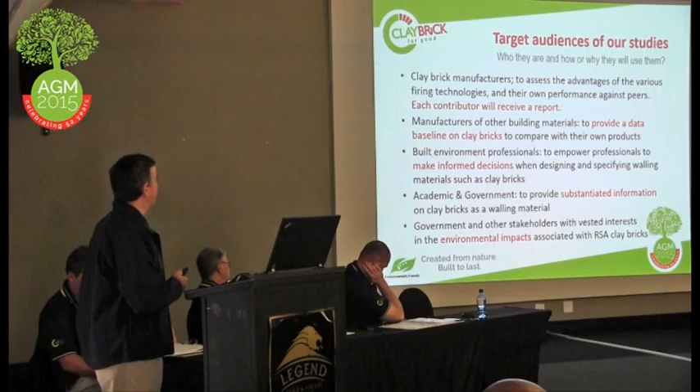I'm sure you're wondering how we're going to get the benefit out of a lot of this research and these studies, and I'm hoping it's now going to start showing that aspect of how we're going to use this work.

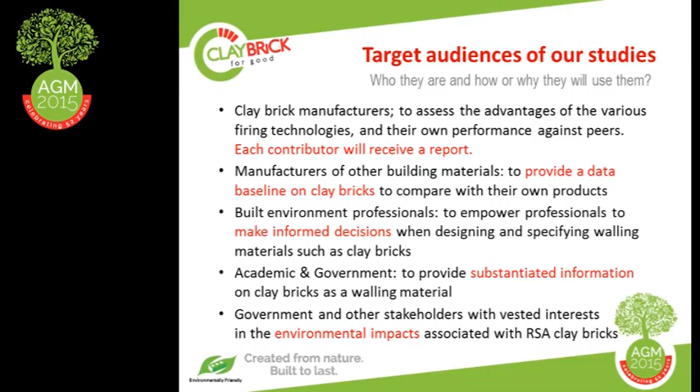Each of you who contributed to the life cycle assessment - my thanks again for your efforts - will receive a report indicating where you stand in relation to your peers on a number of environmental indicators. For example, on carbon emissions and energy intensity, you'll be able to benchmark yourself and your technologies against others in the sector.

I'll throw up a couple of slides to give you an inkling of how this might be used. It'll provide baseline data, and I think other building material manufacturers will now be able to compare against you guys in the clay brick industry, and they'll all have to benchmark themselves against you.

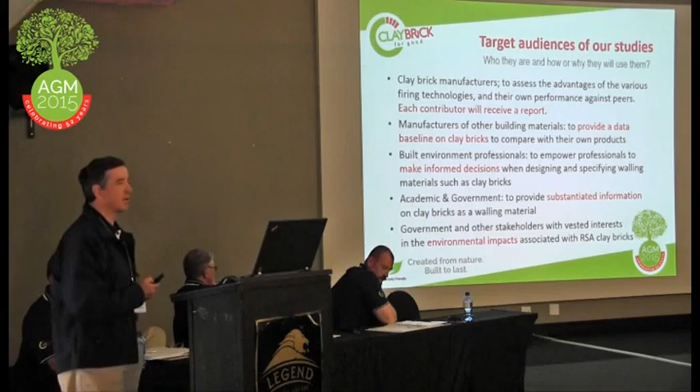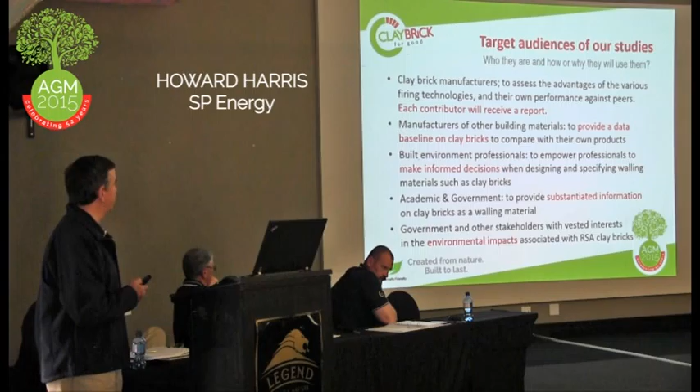I think architects will be in a better position. I've already had queries from architects in the green building sector wanting to put together comparative data on various building systems, and we're going to find this LCA data can be slotted into some of these analyses.

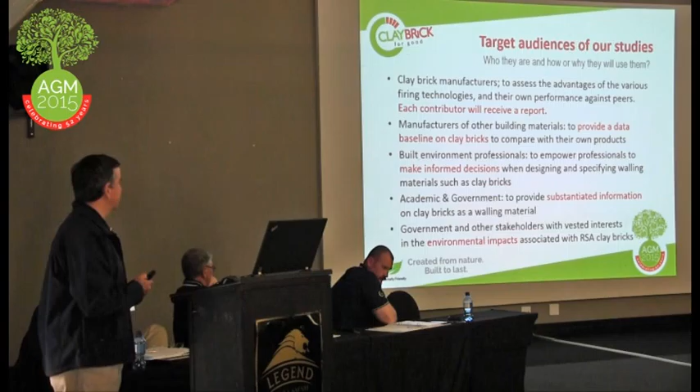And of course, government and academia now have substantiated information, and they can assess the environmental impacts of clay brick on a fair basis.

The environmental life cycle assessment - what is it, where is it, who will it educate, and when and how will we see the benefits? Hopefully I'm going to answer some of these questions, but it's here. Ladies and gentlemen, it's the biggest technical or research project I believe the CBA has ever undertaken, in support of these three pillars of sustainability, and it actually exists.

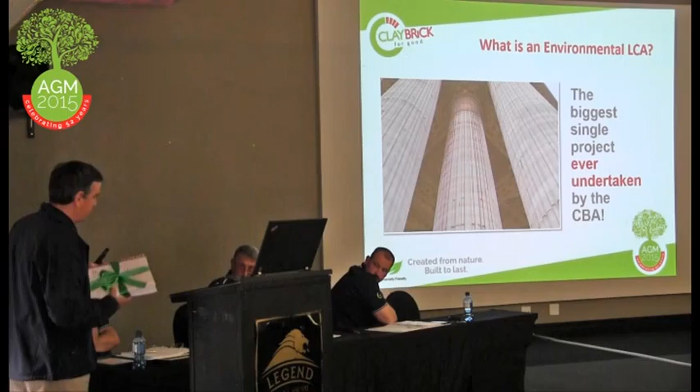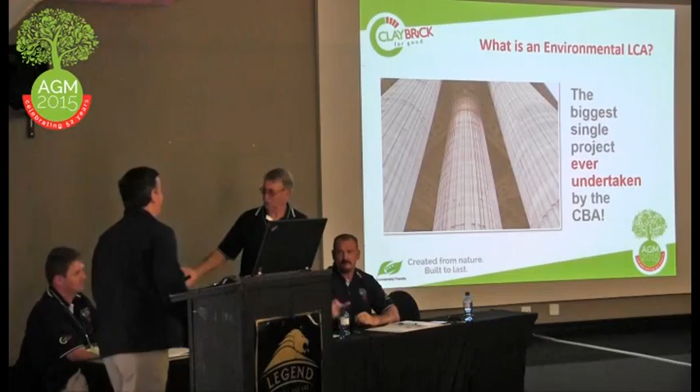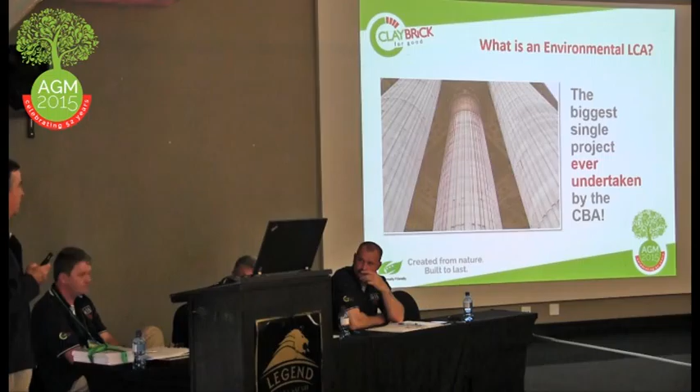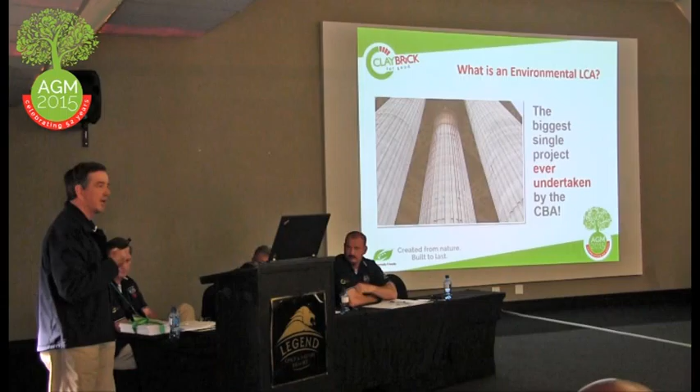A significant investment by yourselves, an excellent bit of work by the University of Pretoria. The lead student who did this work got his master's degree cum laude. It has been recognized by the Swiss reviewers as excellent work, and in the process we also have an additional spin-off: the thermal performance study, which I'll elaborate on further.

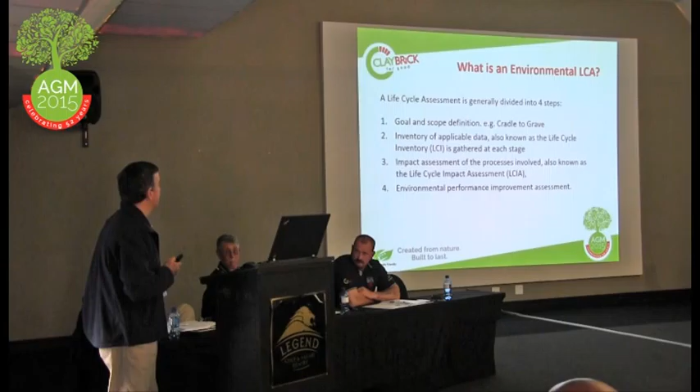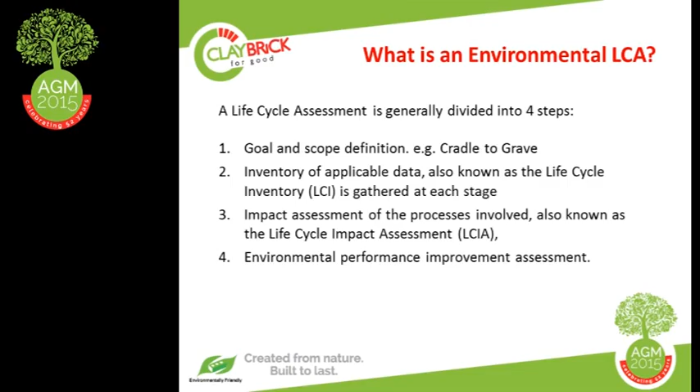For those who haven't encountered this LCA concept, it's an across-the-board assessment of how your product performs at all stages, from cradle through to grave, or cradle through to gate, and then ultimately the recycling stages are brought into account. Generally, following the ISO 14040 or 14044 processes, it goes through a life cycle inventory examining impacts at each stage, then an impact assessment phase, and finally all environmental performances are reviewed.

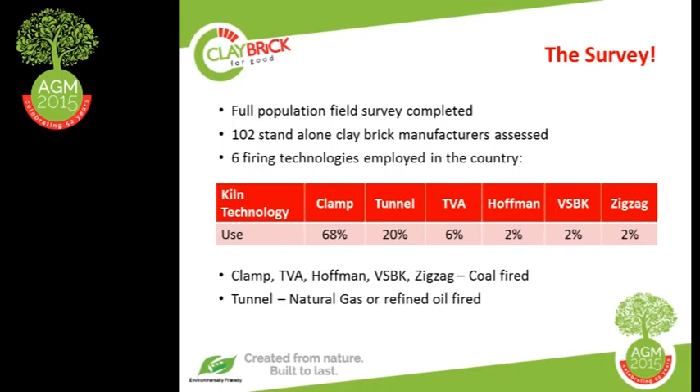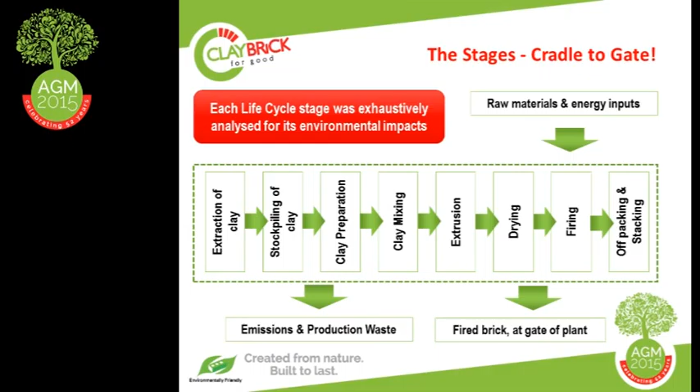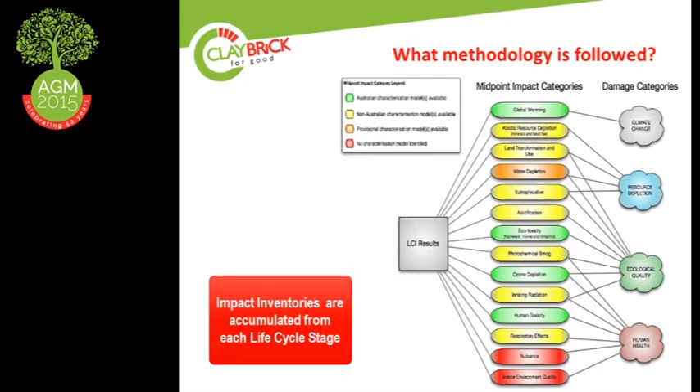In the process we interrogated some 102 standalone clay manufacturing plants, six firing technologies across the board that you'll be familiar with. We followed each stage of the brick-making process and gathered information on global warming, water depletion, acidification, and a whole host of other metrics.

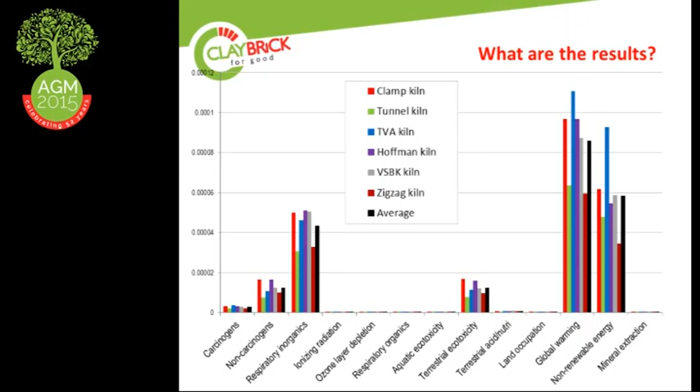So this sort of data is now going to become available to each of you. You'll be able to compare yourselves against your peers, and compare your technologies against other firing technologies.

We're going to, as Nico said, have a roadshow, and more of this detail will be rolled out. The data is vast.

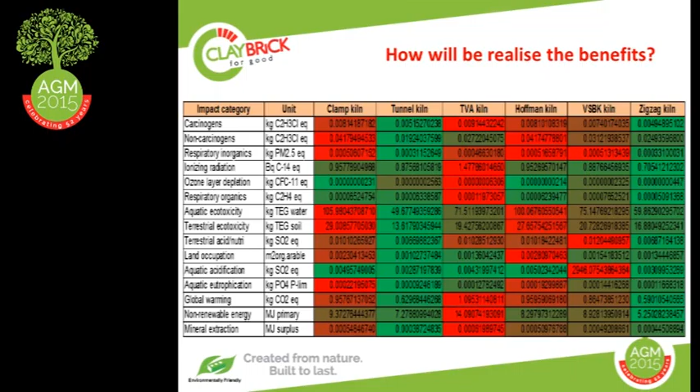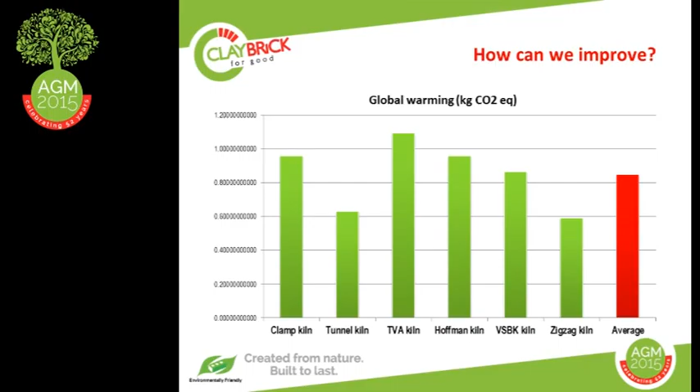Incidentally, the red blocks indicate high or high range on each of those parameters. The greens, as you might expect, are low impact. So each of your firing technologies has environmental impacts, some less than others, and this will be useful to those of you making decisions about perhaps changing your firing technology. As per that very exciting debate held before tea, many of you are prepared to make moves to improve your environmental performance.

So how will we realize these LCA benefits? The roadshow has been mentioned, and this will be an opportunity for you to invite your publics in each of your areas - the local authorities, government bodies, significant clients, architects, etc. We need to get them all there.

I think further down the line we'll find that comparing products requires something like the Sustainable Building Material Index. When we start to compare these IBTs or ABTs, whatever they are, against clay brick on a fair basis, we will have to use some sort of tool such as this index.

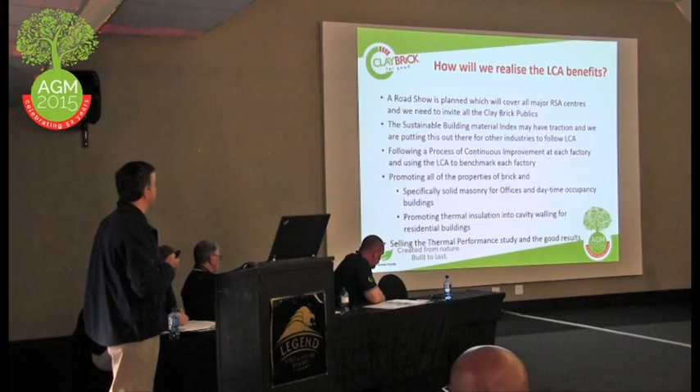Also, for those of you following a process of continuous improvement in your plants, you now have benchmarks. But fundamentally...

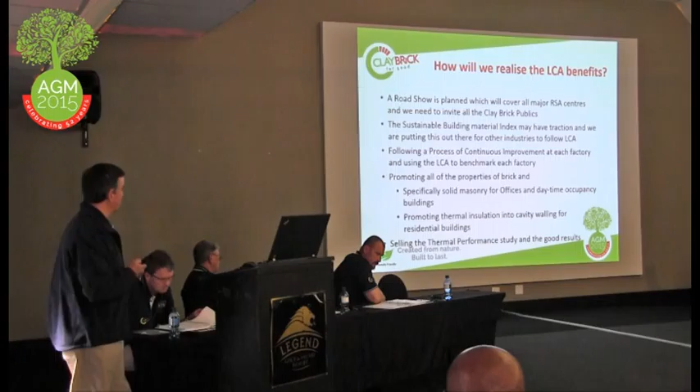Let's call them selling points, which come out of this study for clay brick - specifically that solid masonry solutions for offices and daytime occupancy buildings come out top, certainly from an energy efficiency and environmental impact point of view. It's perhaps surprising to learn this.

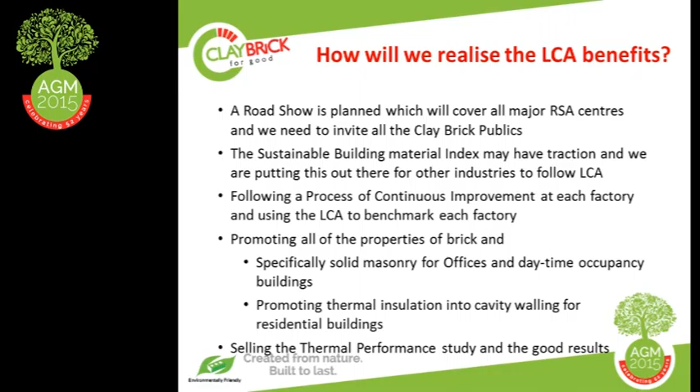I think everybody might have expected that insulated wall versions would show the lowest energy usage, but it's not the case. It has to do with our climate, I think - the large fluctuations in temperature, particularly in the interior, mean buildings have time to cool down overnight. Because many of your offices and daytime occupancy buildings are occupant driven, it's the lighting and human activity load which has to be avoided by these buildings.

In residential buildings, an opposite conclusion is reached: thermal insulation in a cavity wall is by far the best solution. Basically, the more insulation in that cavity, the better the result. This is going to drive our strategy and tactics in the standards arena as we try to convince others around the table that we can do better for our national environmental footprint by moving towards cavity walling in residential buildings. Selling this thermal performance study and its good results is now a real possibility.

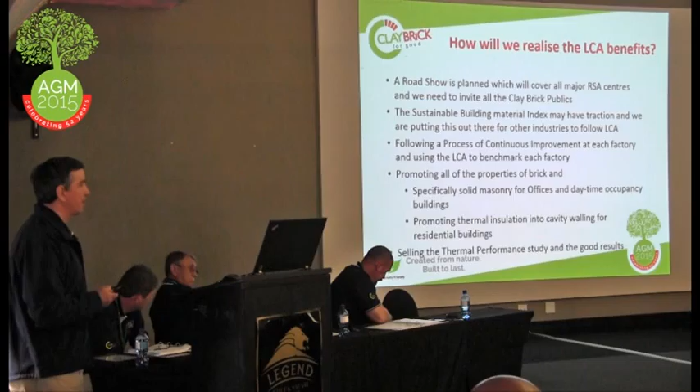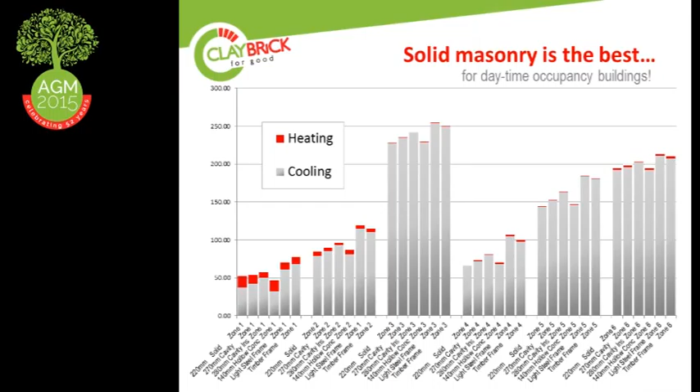Here's the picture for non-residential buildings. There are 6 groups which correspond to 6 climatic regions, and the trend is virtually consistent across all of them: the solid clay brick wall, always on the left of each group, is the lowest energy user. Non-residential buildings mainly have a cooling requirement; there's relatively little heating required in these office and institutional buildings.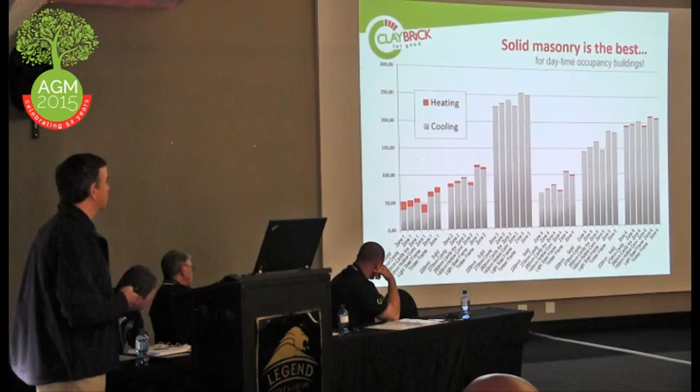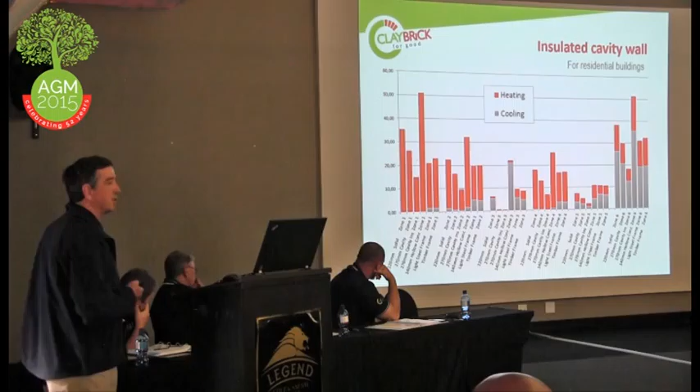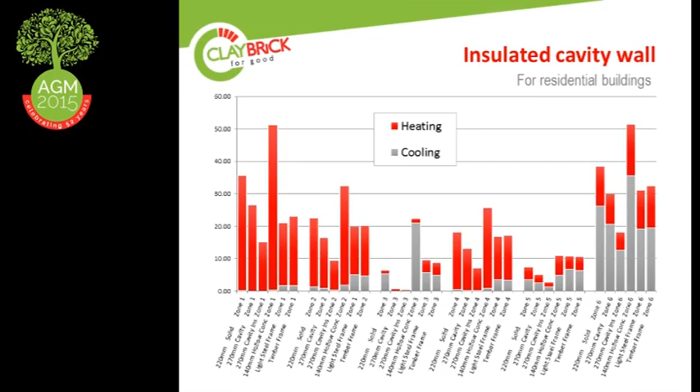If I move to the residential picture, it's totally different. Here you're thinking about buildings operated perhaps mainly on a 24-hour basis, so heating becomes quite an important issue. There's a trend consistent across all 6 climatic zones again: if you look at each group of 6, the first 3 on the left are the solid, the cavity, and the insulated cavity walls. You can see that as you add more insulation to your double masonry wall, you get better, lower energy usage. This is a strong basis for advancing the argument for cavity wall insulation in the standards and building regulations arena.

To reiterate: in the residential environment, the clay brick insulated product is top, and the hollow concrete block wall is consistently the worst. Unfortunately, government hasn't seen its way yet to putting more money into walling, which will mean we'll be burdening the poorer people in our community with inefficient housing. It's rather a sad admission to have to make.

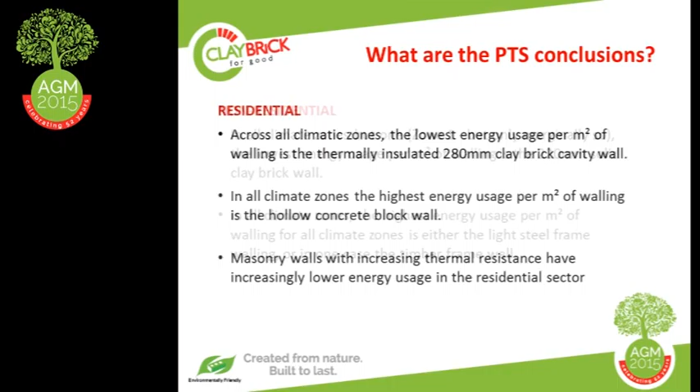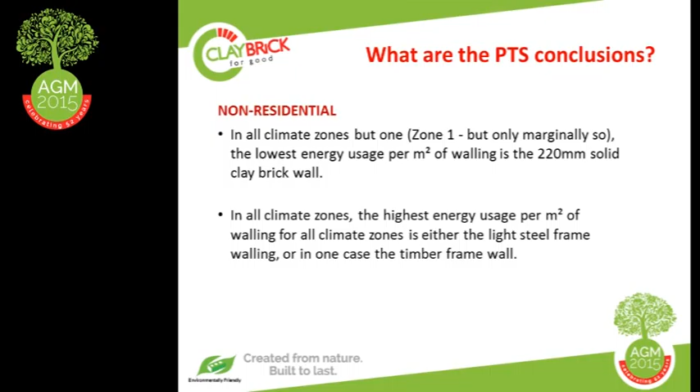There has been some progress on the socio-economic project. I was hoping to have a more concrete interim report in hand by now, but it hasn't reached me yet. I'm confident Worley Parsons, being the credible firm they are, will have good work for us. The plus point is we managed to get an economic assessment exercise coming out of this project as a kind of bonus, since Worley Parsons, having a strong economic department, have thrown that in.

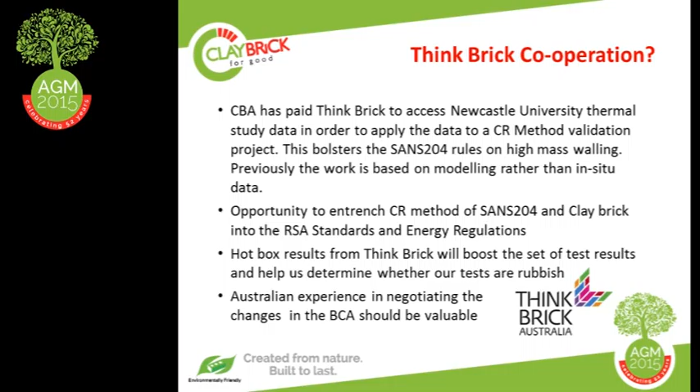On the Think-Brick cooperation front: it's a bit of a hope of mine that the data sitting at the University of Newcastle, from studies of some small buildings they've had for 8 or 10 years, is going to help us validate some of the results from the thermal performance study. I must emphasize that the thermal performance study is a software-based analysis, and we need to ensure real life actually correlates with the software in order to make it absolutely unimpeachable.

If we can do this, we're looking for any data out there—measured results on buildings—which we should gobble up and analyze to see whether the empirical evidence supports the software-generated modeling results.

This roadshow is going to be really important to realize the benefits of your investment in these research works. I believe the Sustainable Building Material Index, which you guys have paid for and developed, is really demonstrating leadership, and other industries must surely pick up on something like this to compare one system against another from an environmental perspective. Fundamentally, we've got some really good news from the thermal performance study which will enhance your sales story out there. Thank you very much, ladies and gentlemen.